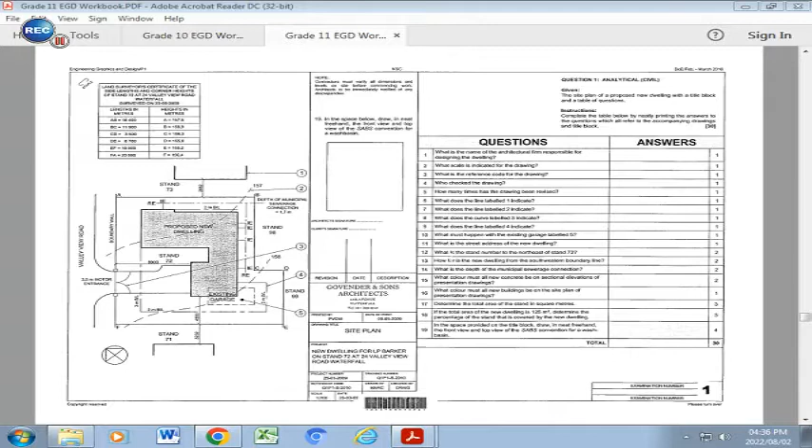Grade 11 learners, we are looking at this analytical question, and we want to focus on the questions from 1 to number 19. We have the site plan on our left hand side, and I want to zoom in by finding all the answers to the questions on your right. Some of the questions are lower order, some are middle order, and a few at the bottom would be higher order questions. Let's have a closer look.

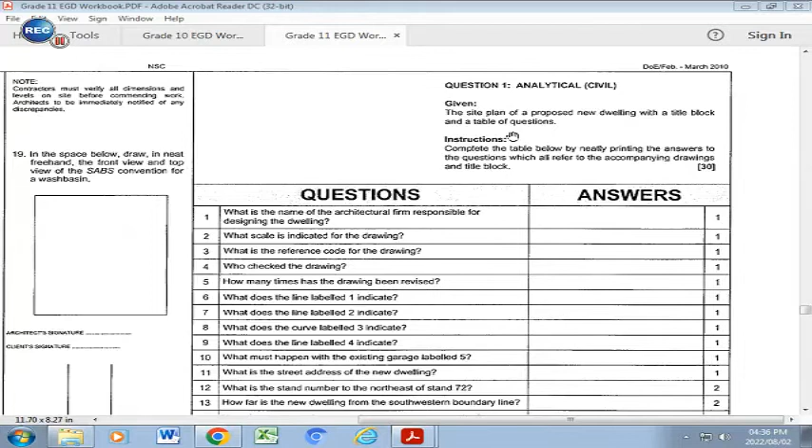If you read the instructions, it states that the site plan of a proposed new dwelling has a title block at the bottom and a table of questions. You need to complete the table below by neatly printing in the answers to the questions, which all refer to the accompanying drawing and the title block.

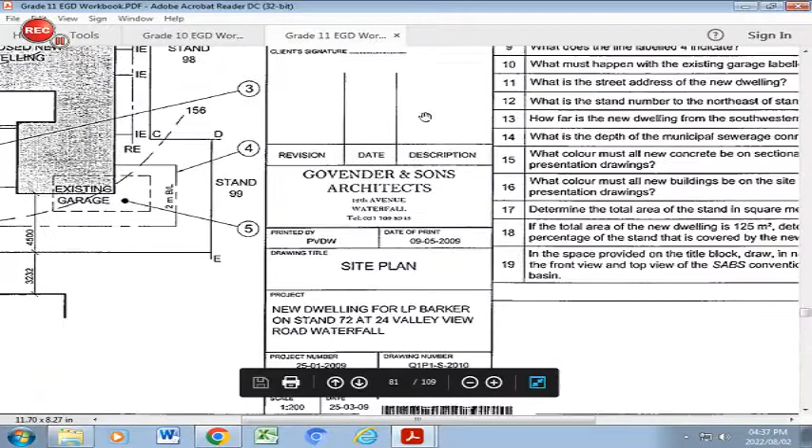If you look at question number 1, what is the name of the architectural firm responsible for designing the dwelling? We're going to go right down here, and it's Govender and Sons Architects. That's your answer for number 1.

What scale is indicated for the drawing? We go down and find the scale, printed right here at the bottom, and you will find that the scale is 1:200.

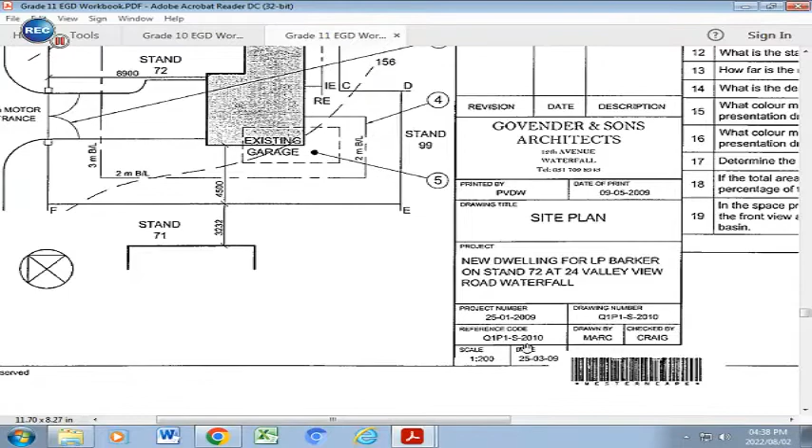If we go to number 3, what is the reference code for the drawing? We look at the reference code, which is right here at the bottom: Q1P1-S-2010. That's the reference code.

Go to number 4, who checked the drawing, back to our title bar, and we're going to find number 4 right here. So the drawing was checked by Craig. Drawn by Marc, checked by Craig. So Craig is answer 4.

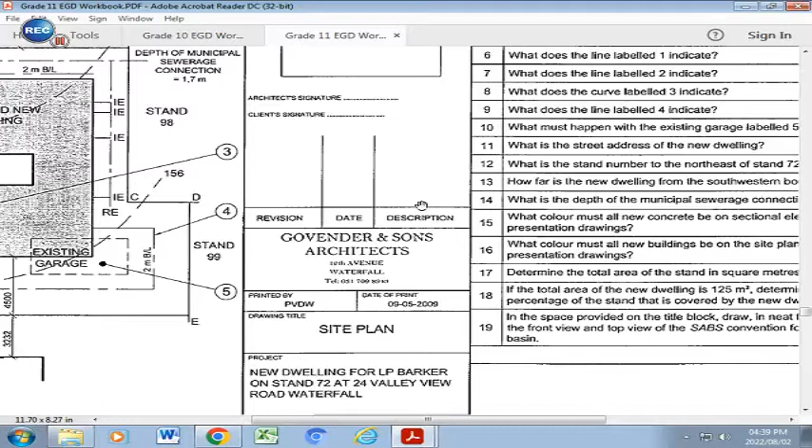How many times has the drawing been revised? We're going to go here and find this is the revised column. It works its way from the bottom up. At the moment there are no revisions, so the answer would be 0 or none.

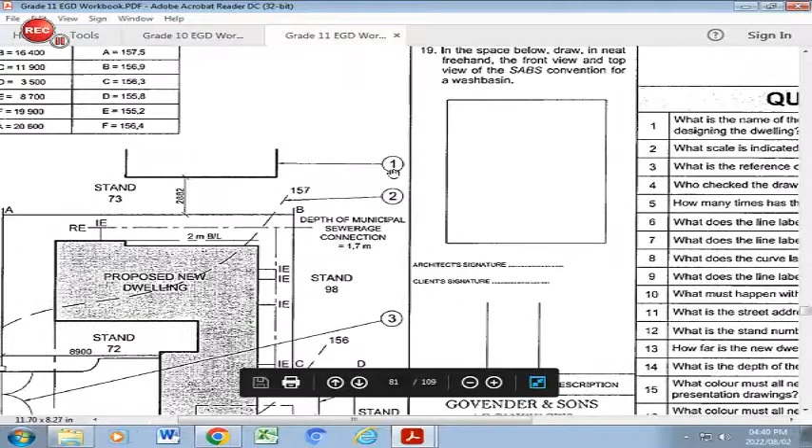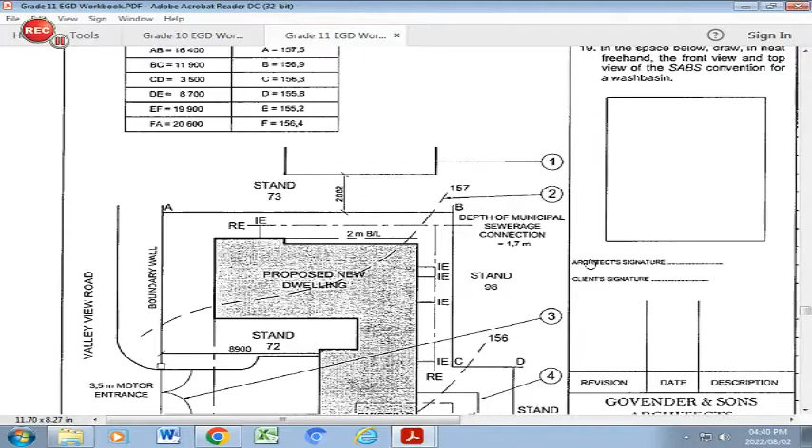Number 6, what does the line label 1 indicate? And we do number 7 as well, what does the line label 2 indicate? So we're going to find number 1. Number 1 is the building of the neighbors, or the adjacent building - the incomplete section of the house, like this house. If you had to complete it, it would probably continue further on this side. So that's the adjacent building, adjacent structure, or the neighbor's dwelling. If you look at number 2, you will find it refers to this dash line that curves here on the site plan. That is a contour line, which gives you height above sea level. So the answers must be placed in here.

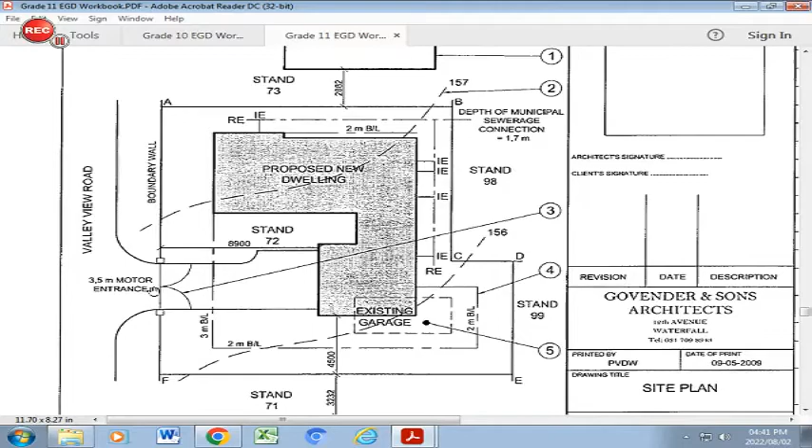If you look at number 8, what does the curve label 3 indicate? So we go to number 3. It's right down here - that is going to be the swing of this gate. It will not be a door because the door is normally on the inside; that would refer to a gate. That is the swing of the double gate that you will find in the entrance section of the site plan. So the swing of the gate, or gate swing.

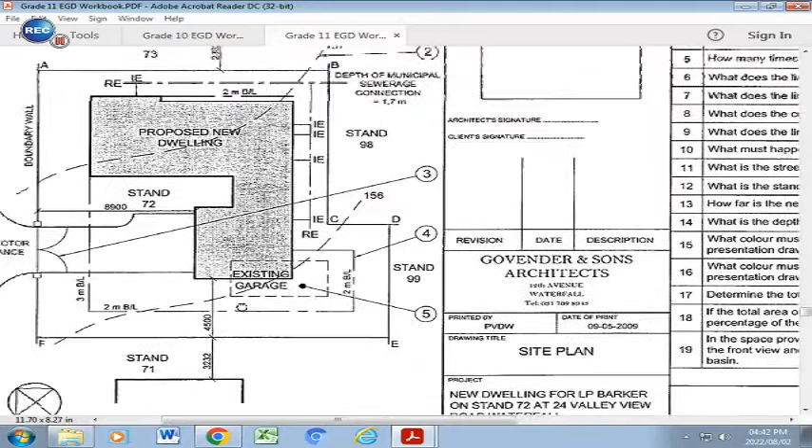Let's look at number 9. What does the line labeled 4 indicate? So we're going to go to number 4, and you will find that it refers to this chain line that you will see going right around. That refers to the building line, and the building line means that no building must be outside of that specific space.

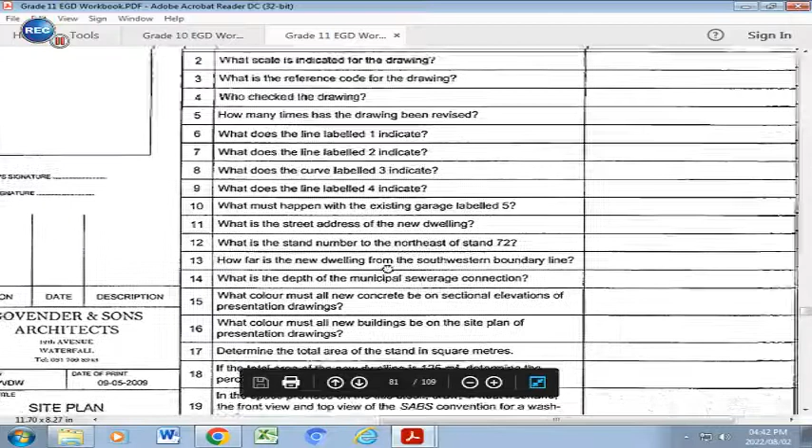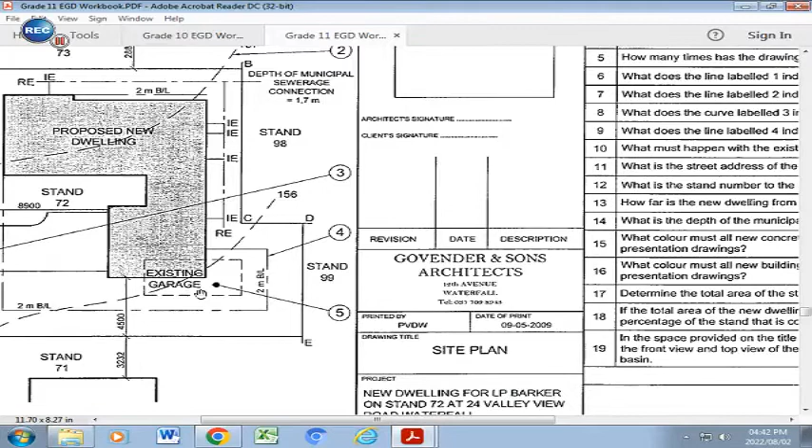Right, we go to number 10. What must happen with the existing garage labeled 5? So there is an existing garage labeled 5, and it has a dash line right around. This means that this particular building has to be demolished, it has to be thrown down. So that is your answer to number 10.

What is the street address of the new dwelling? So we're going down to the project, and there is the street address: number 24 Valley View Road, Waterfall.

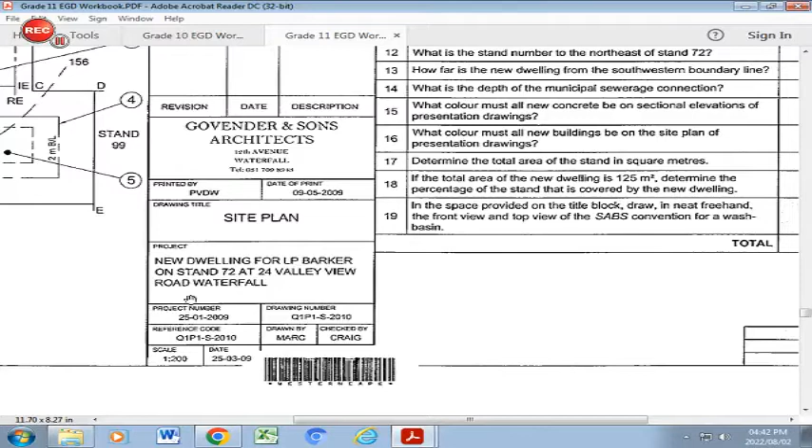We go to number 12. What is the stand number to the northeast of stand 72?

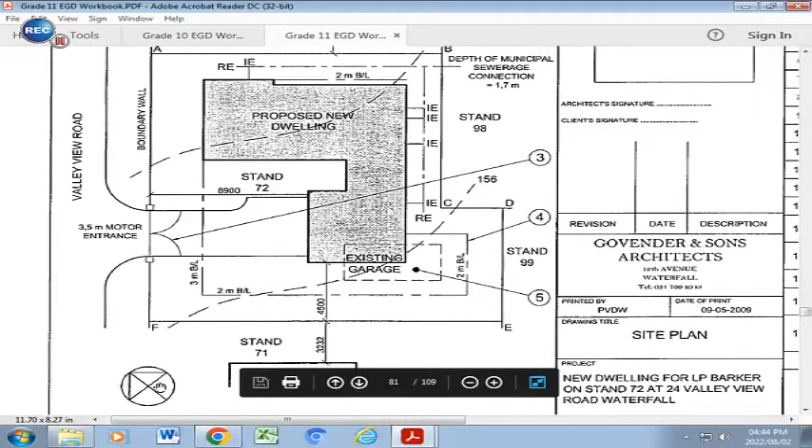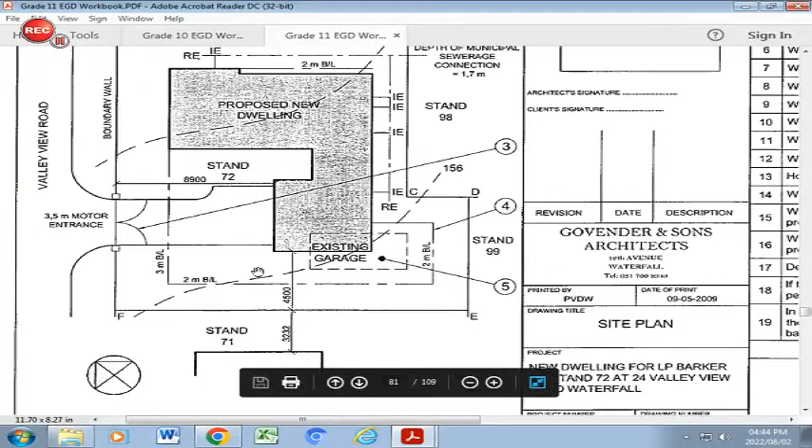For this question, we have to look at our direction symbol - that is the symbol you will see right there. The arrow points to north, so north is going to be right here on this slant, south is at the bottom, west is on this side, and east is on that side over there. To make this question a lot easier, I would take my direction north point sign and place it right here in the middle of my existing stand, which is stand 72. So up there is north, down here is south, this is west, and that's east, and between north and east is going to be stand 73.

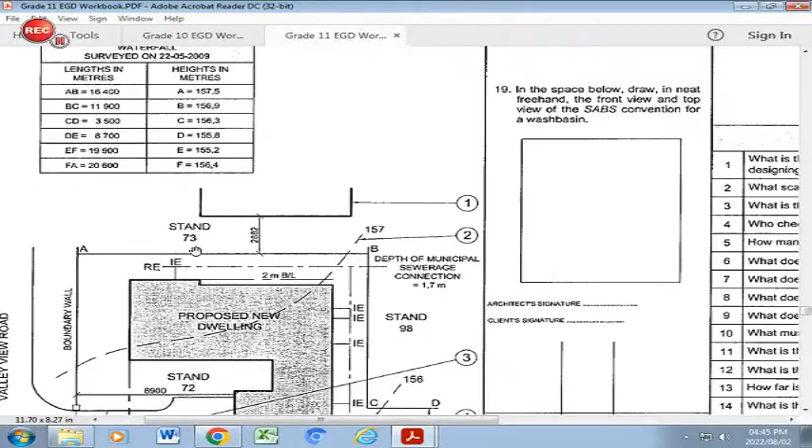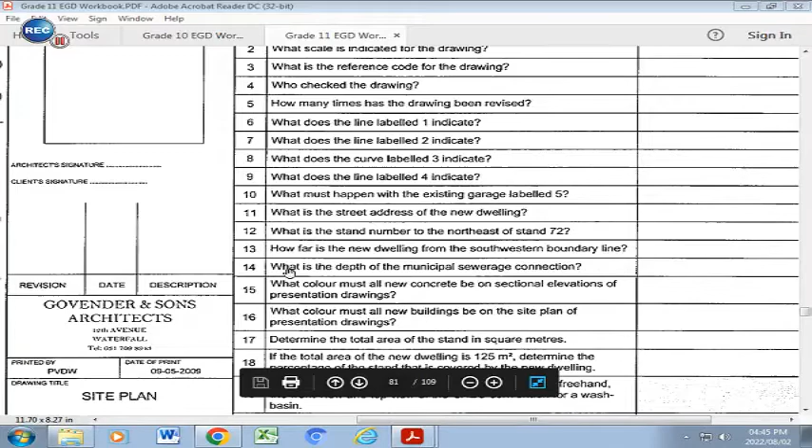We go to our next question, which is question number 13. How far is the new dwelling from the southwestern boundary line? So we have to determine firstly where the southwestern boundary line is, and then afterwards determine the distance.

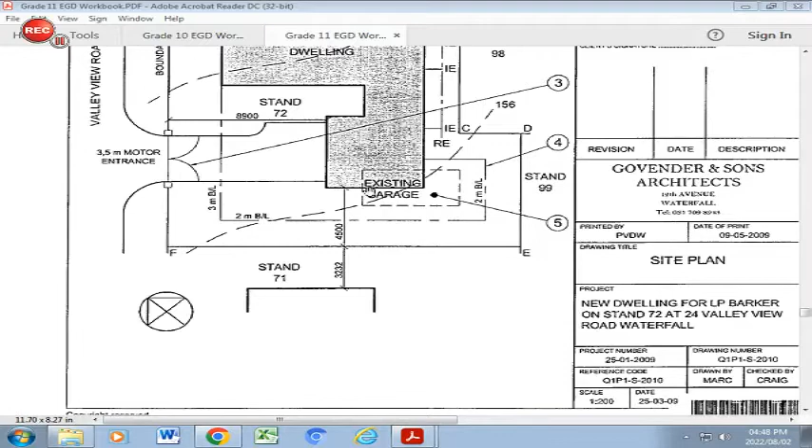Let's go down to our site plan. When we look at north, south, west, east, we will find that down here would be your southwest, right here, which is this. So there's the existing dwelling. This dimension here will give you the distance: 4.5 meters is the distance from the boundary line until the existing garage.

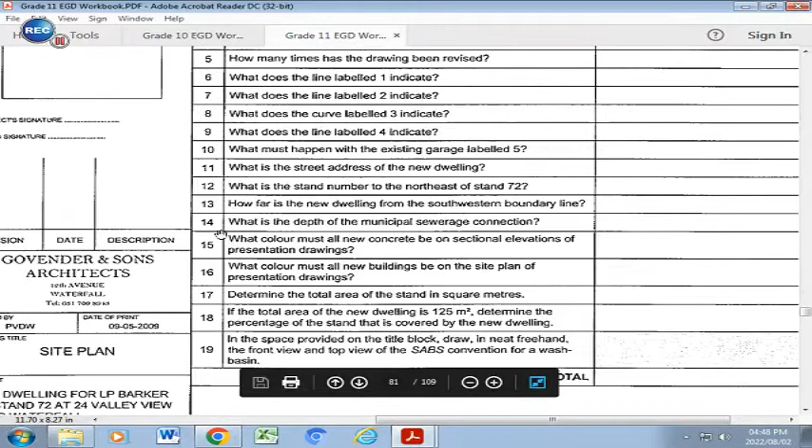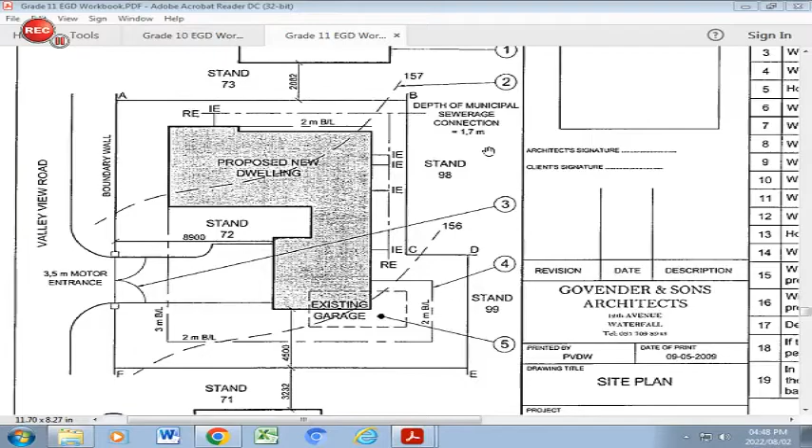Let's go to our next question, question number 14. What is the depth of the municipal sewerage connection? If we go to the municipal sewer connection on your drawing, which you are going to find right here, the depth of the municipal sewer connection equals 1.7 meters. And you will write in 1.7 meters here.

Number 15, what color must all new concrete be on the sectional elevation of the presentation drawings? New concrete, and that is going to be green.

Number 16, what color must all new buildings be on the site plan of the presentation drawings? That color is going to be red.

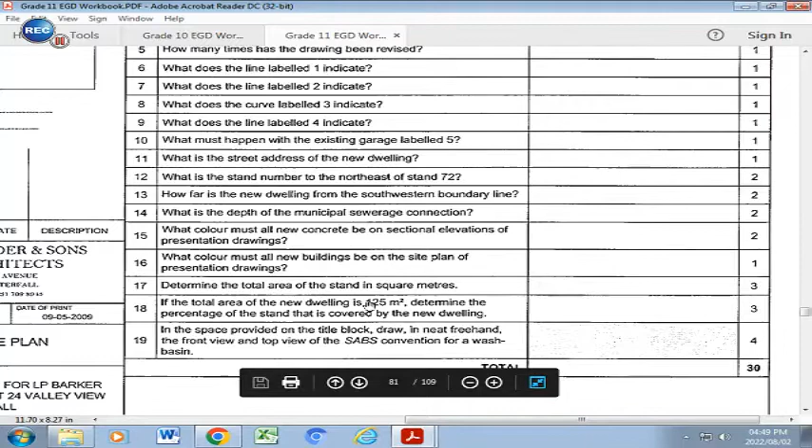Number 17, determine the total area of the stand in square meters. So here we have to look at the total area of the stand in meters, the area of the entire stand that we see here.

Now you will see it's an oddly shaped stand. So what we are going to do, we have two options. We can either break the shape right into half here, so that we have one rectangle there and another rectangle over here. Alternatively, we can break it down here so that we have one big rectangle here and one small rectangle there.

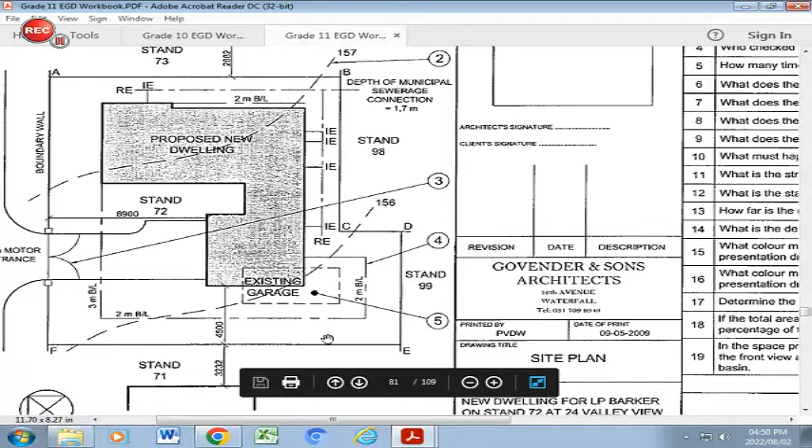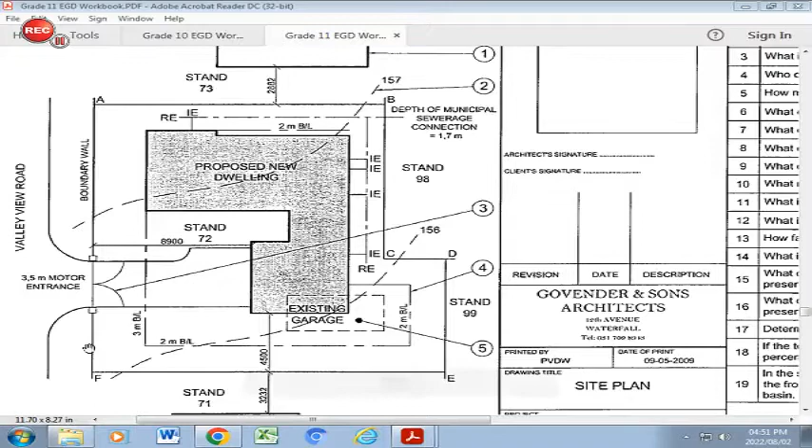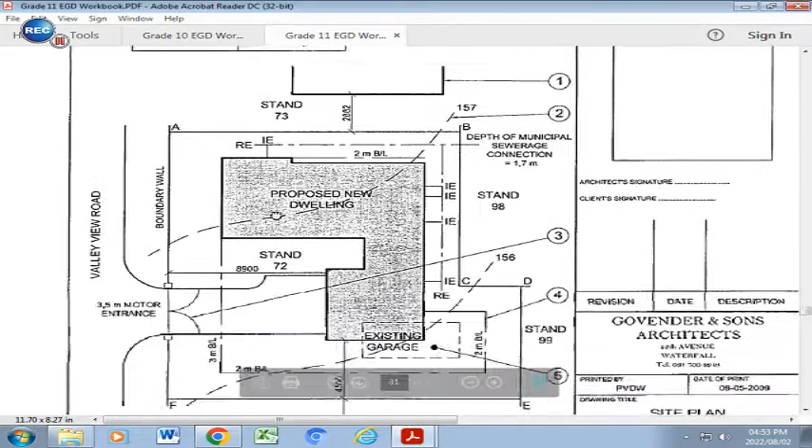I'm going to go with option 2, where I'm going to take this length here and that width over there, and say length times breadth, which is AB times AF. So I'm going to take those two values and find my lengths over here. AB is going to be 16.4, and AF is going to be 20.6. That will give me 337.84, which I'm going to keep in my memory, and that is the area of this section over here.

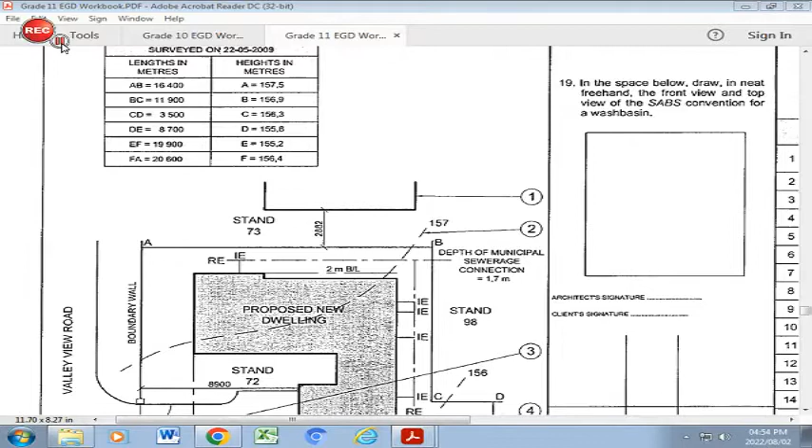Now I'm going to go to this little part which I've broken up, where I take CD and multiply that with DE. The two values I have are CD, which is 3.5, and DE, which is 8.7. That leaves you with an answer of 30.45. So what you have to do, since I've worked it out separately, is add both together to give me the area.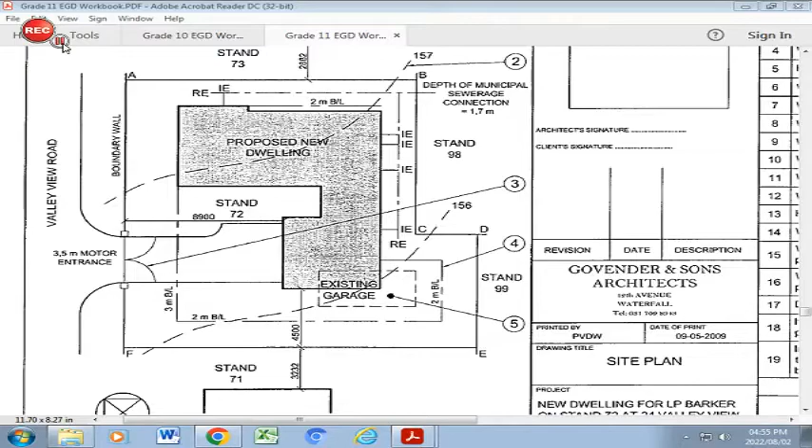So I will have to say 336.2 plus 12.95, and that will leave me with an answer of 349.15 meters square. Right, let's go to our next question, which is question number 18.

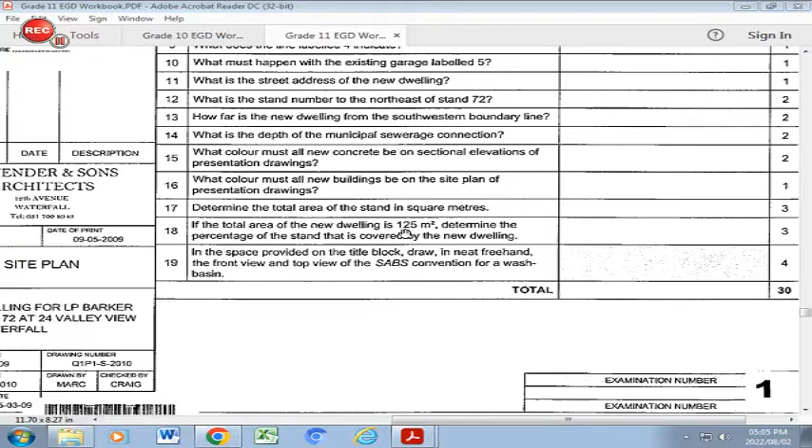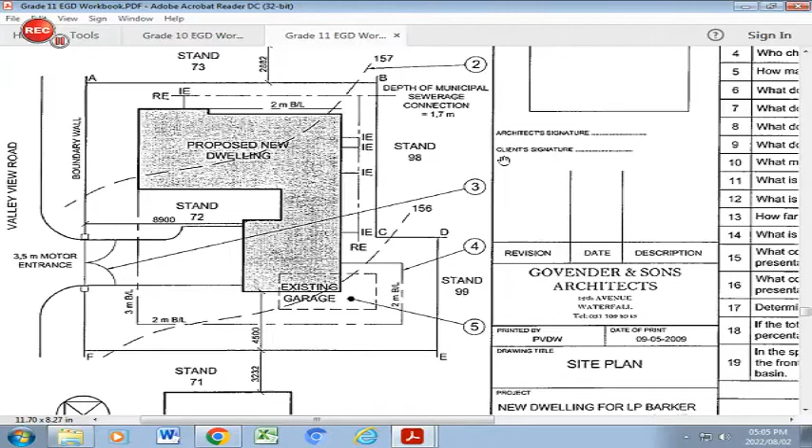If the total area of the new dwelling is 125 square meters, determine the percentage of the stand that is covered by the new dwelling. So what you need to do here is take the 125 meters square, which is the coverage of this new dwelling, and divide that 125 by the entire area which you have just calculated of 349.15, and because you need a percentage, you will need to times that answer by 100.

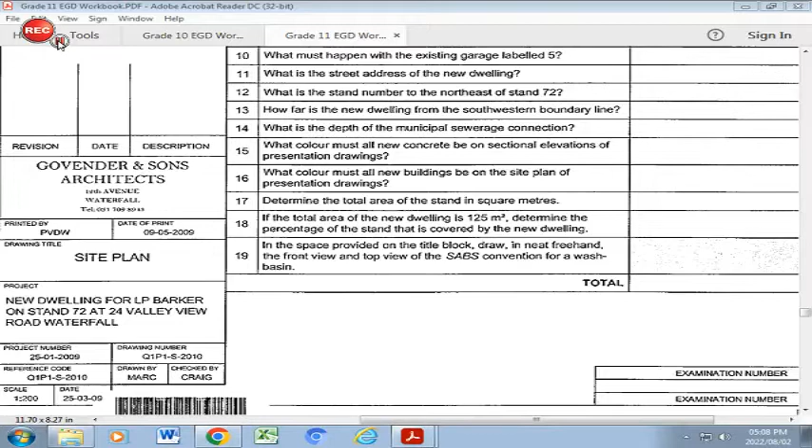Will give you an amount of 35%, which will be the coverage.

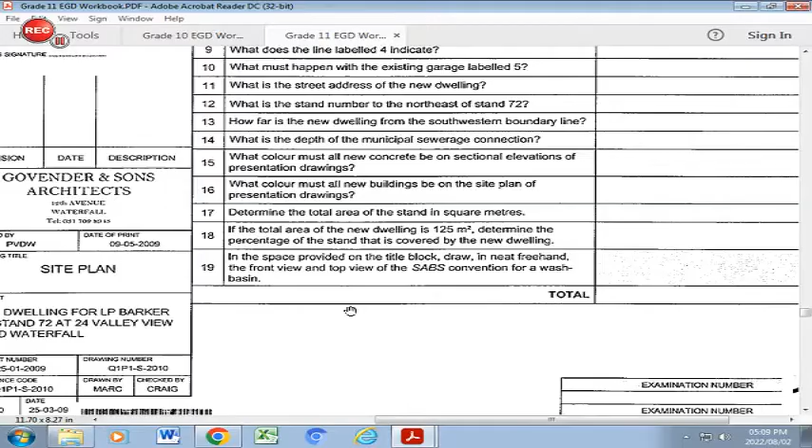Let's look at number 19. In the space provided in the title block, you need to draw freehand the front view and top view of the SABS convention, the symbol for a wash basin. So in that space there, you're going to draw the front view and the top view of a wash basin.

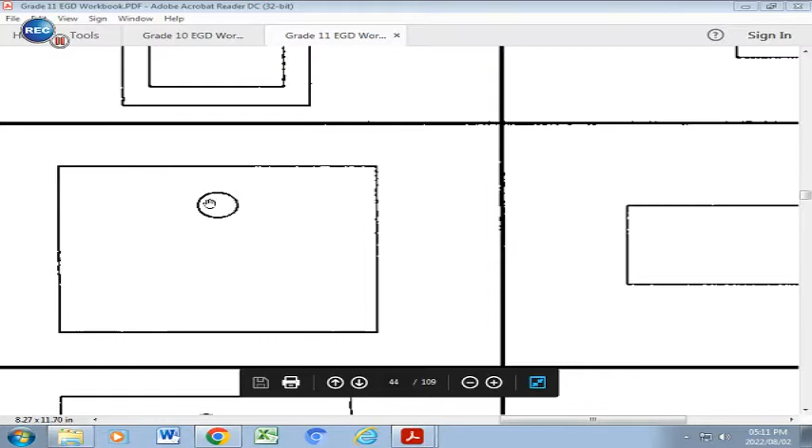This is going to be your symbol as your plan view of your wash basin, seen from the top with the trap there. And this is going to be your front view of your wash basin, and it must be drawn on top of this plan view.

Learners, that concludes our analytical activity which we did, and I hope that you will be able to fill in all the answers from the explanation that has been given to you.